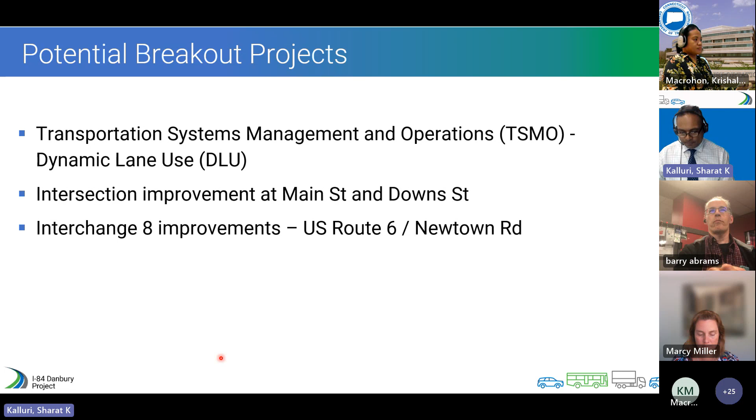So let's talk about the first one, which is the TSMO dynamic lane use. What is TSMO? TSMO is an initiative by the Federal Highway Administration. This basically looks at maximizing the use of existing and planned transportation infrastructure. It doesn't have to be roadways—it's transit, it could be multimodal rail, it could be active transportation, which is ped and bike, it could also be other types of technology, it could be freight related.

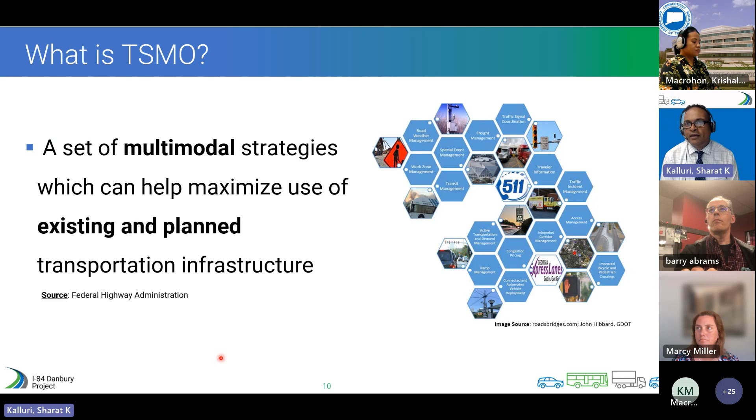The beauty of TSMO is it could be done fairly quickly. It maximizes the use of the existing highway. A lot of the work in TSMO is done within the existing footprint of the highway and does not require any additional right of way. So in terms of implementation, this is a pretty quick implementation timeframe turnaround. When I say quick, it's usually much quicker than a larger project would happen.

Keeping that in mind, for dynamic lane use, there are about 45 to 50 strategies that are part of the TSMO package. Dynamic lane use is one of them, which we'll get into in a bit more detail. The whole basic idea of dynamic lane use is that you're allowed to open or close a travel lane on the highway based on traffic conditions.

I go back to times when we were on the Tappan Zee Bridge, where there are lane use arrows on top that people adhere to, depending on time of day those lanes are being used or not used. There are other states like Michigan, Wisconsin, Pennsylvania, and other states down south also using dynamic lane use in different ways. We'll talk about the Michigan example in this presentation, but keep in mind these travel lanes are open depending on traffic conditions—it could be incidents, it could be other types of special events. So it's a strategy that's available to implement when there's a need to open that travel lane.

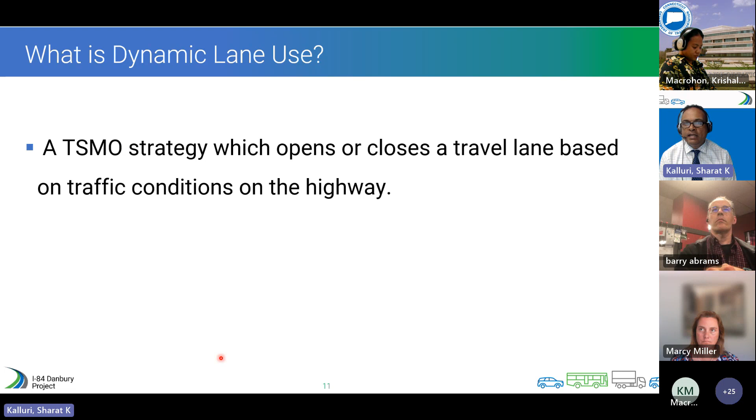So the extent of the dynamic lane use is we went through a lot of evaluation trying to look at the roadway geometry and conditions and the existing bridges along this corridor. The general area we're looking to start is just east of Lake Avenue, going eastbound to just around the Route 7 interchange on the east side. So the limits are somewhere just east of Lake Avenue to Route 7. The exact limits have not been defined.

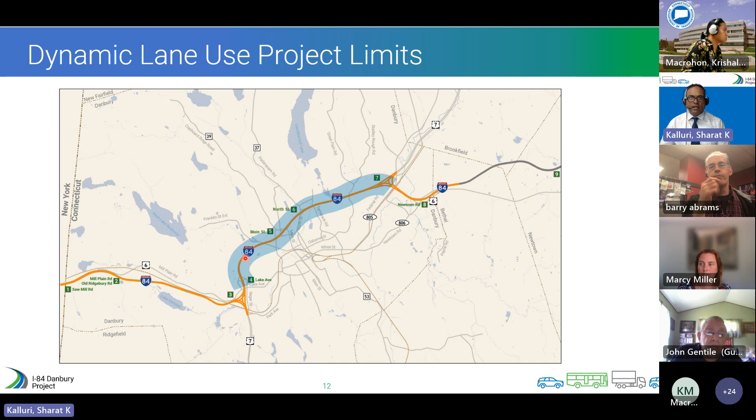That requires a little bit more engineering and design, but that's the general extent. Coming in westbound would be somewhere where the 7 on-ramp comes on, and the place where the 7 splits to the left-hand exit. I have a little bit more detailed plans later on, but it's about a 3.5 to 4 mile stretch of 84 that we're looking at, and this is the area where the need is in those commuter peak periods. That's in the morning going into New York, and the afternoon coming from New York, and that's kind of where the idea of the dynamic lane use came into study.

So general concept, this is a graphic that kind of illustrates. This is again kind of taking a piece of 84. This is not exactly how it's going to be done, just to show the concept of how it operates. So if you see this, the dynamic lane use in this case that we are looking at is being looked at as the use of the left side shoulder. There's an existing median, as you all know, there's lighting on the median. The dynamic lane would be on the left side, on the shoulder of the left side.

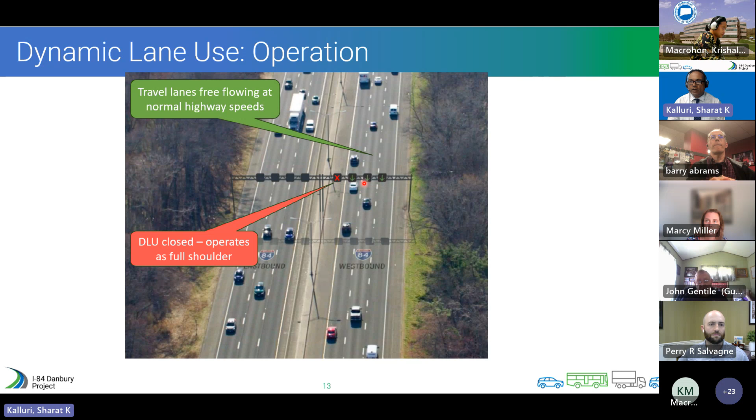So the lane use signs here are indicative of what lanes are open. Here it shows 3 lanes are open. You can see the traffic generally seems pretty free flowing. That's why the dynamic lane use is closed. Since there's no need to open that because the traffic seems pretty good, the lane is closed. But then as the traffic builds up, and this is a situation in the morning rush hour if you're going towards New York, same in the afternoon rush hour coming from New York, now suddenly it warrants the need to open up that lane. And that's kind of when it would trigger it.

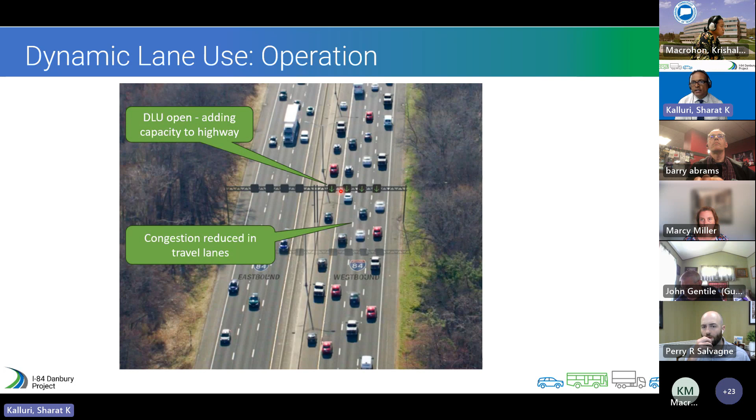So there are going to be triggers or strategies that will be looked at, for when the lane should be open and when it should be closed. Generally speaking, the commuter peak periods we know is where the need is in the morning and afternoon. But there could be other events, and as you'll see in the Michigan example, they've been using it for different situations. The lane could be opened or closed for any special events, or if an incident happens where the right lane is closed, the dynamic lane could be opened up to shift traffic over to that shoulder area.

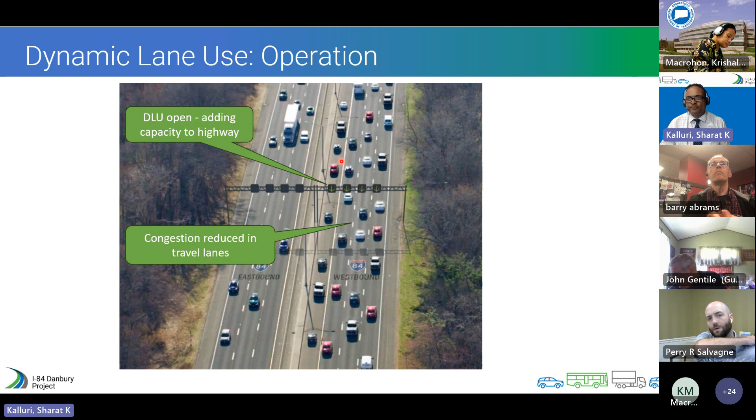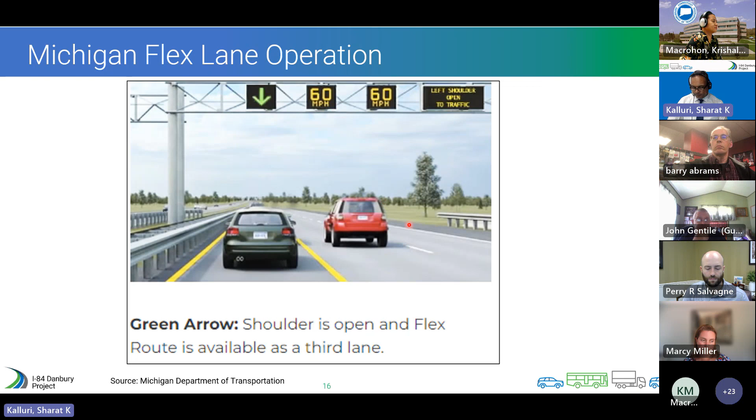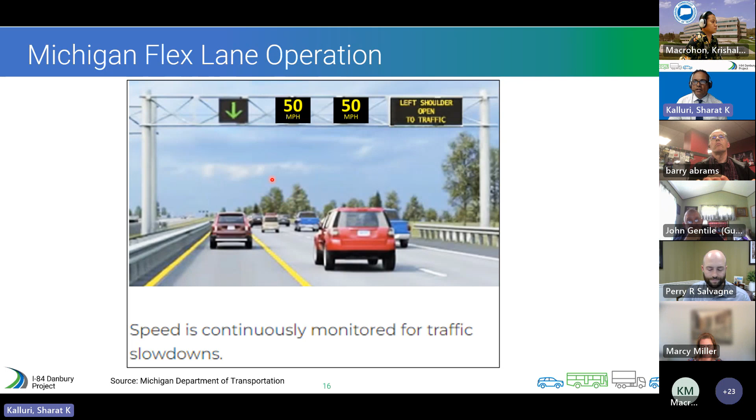In a second scenario, it's possible there's congestion downstream, so speed is continuously monitored and could be changed to a lower limit than 60, allowing people to recognize there could be an incident ahead and that they need to slow down. This type of technology helps the overall operation of the corridor. Essentially, it's a management strategy on how the corridor is operated and how this lane can be opened or closed depending on downstream conditions.

Here's an example of when the lane is closed. You see this is kind of a blank-out sign, meaning the variable speed messaging is no longer active. So whatever the speed limit is on the highway, posted on the signs on the right side, is in effect. This is additional signage that says left shoulder closed to traffic. There's a lot of technology being built in to inform motorists about downstream conditions, and also in advance, so they don't react suddenly to a situation when they get there.

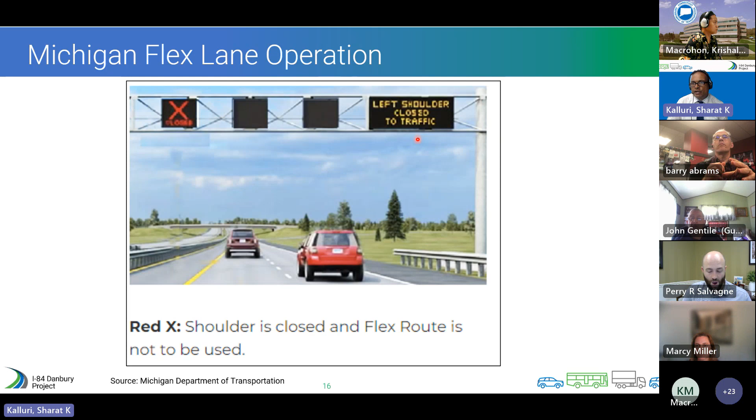The other type of indication is like this situation where a lane is closed. The right lane is closed, and this message sign shows that traffic should merge. This lane is now open because that lane is closed, and it shows an incident ahead. With these signs on the gantry, motorists are informed of conditions and can change their behavior. More importantly, the use of that lane becomes active whenever the need is there at that time.

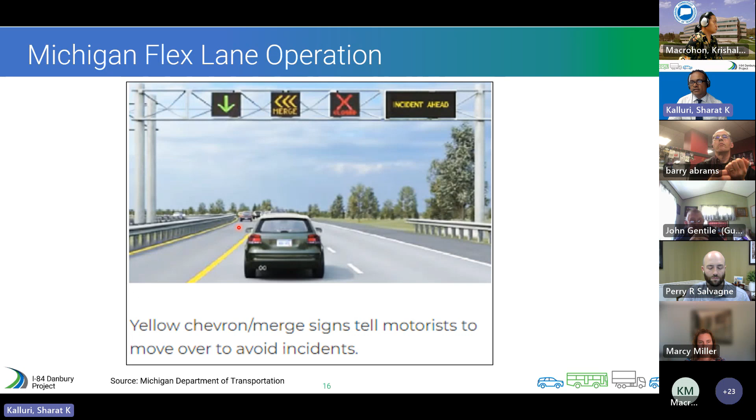Here's a more detailed view generally showing where the DLU use is going to be looked at as part of the I-84 project. This is the Lake Avenue section, just east of Lake Avenue, with the overpass over Lake Avenue. We're looking to start it somewhere where that off ramp comes off to Lake Avenue, and you can kind of see this green lane here.

So the idea is to get that traffic on the left side. One thing I'll talk about later is the presence of these left-hand exits, which will need to be looked at more in design. But the idea is to get traffic onto this shoulder, representing a condition where we would do it in the evening, for example, going eastbound, to allow them to travel and use that lane going east during the evening, and the same applies westbound in the morning.

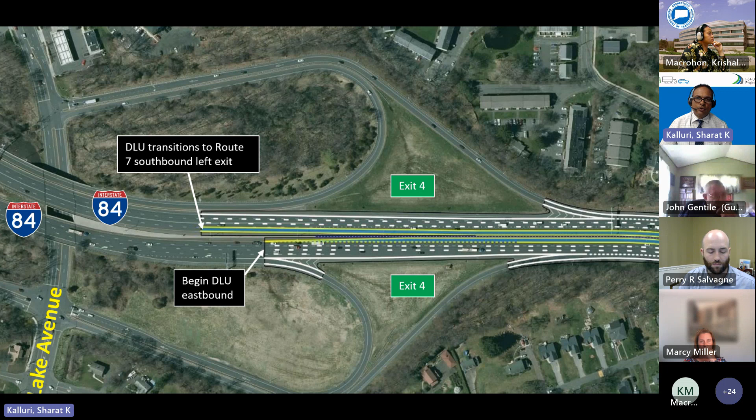But the idea is to use this additional capacity, or the additional shoulder space, for travel during those peak periods and other periods when it's needed.

On the east side, similar idea as the west. In the eastbound direction, it would basically terminate similar to the west into that Route 7 off ramp. One thing not being done as part of this project, which will be a much larger initiative, is switching the left-hand ramps on Route 7 to the right side. Those ramps will remain on the left, and that's why those transitions are critical in terms of how traffic is directed to move out of those lanes.

On the east side, going west, as you're coming from Route 7, this area is going to be opened up to 2 lanes. We've heard this comment from several folks about the Federal Road on-ramp and Route 7 South merging into a single lane before the merge. So the idea is to keep that as a 2-lane on-ramp and merge it in as a 2-lane on-ramp. At some point, for a short section, you'll have 4 lanes, and then that 4th lane would transition into the DLU lane.

That's again a detail we have to work out. The idea is to maintain continuity with the 4 lanes coming in where Route 7 merges in, and transition that to the dynamic lane while still keeping those 4 lanes, so we don't lose that capacity as the transition happens. So those are, generally speaking, the west end and east end concepts.

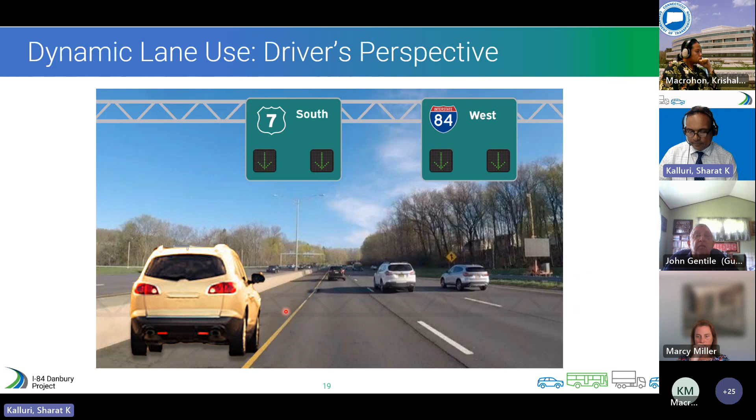Some of the benefits, which we may have mentioned when we presented this concept: the peak hour delay is reduced. Granted, speeds won't be as you'd expect on a regular travel lane, because we're providing a 2-foot shoulder with an 11-foot travel lane that's still constrained. We do see capacity benefits because it provides additional lanes. Some states we've spoken to have seen safety benefits. Essentially, it controls speed, and the variable speed sign is a way of maintaining a certain speed throughout the corridor and controlling traffic flow.

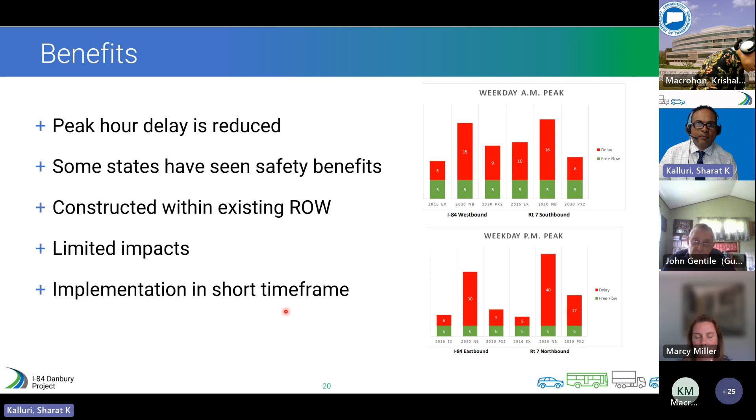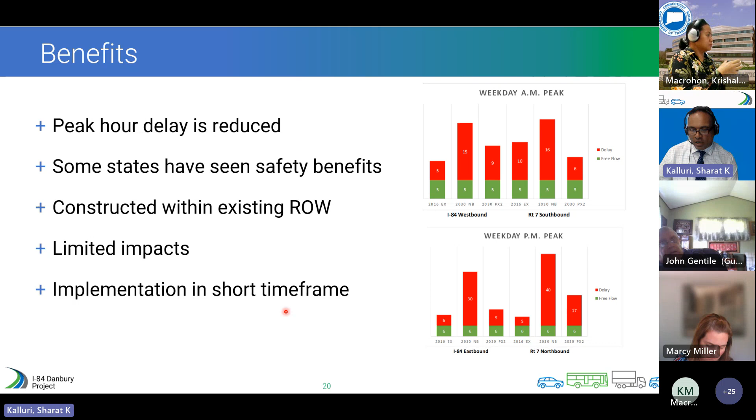It can be constructed within existing right of way, which is what we're seeing in our project. We're going to construct within the existing pavement width. The impacts are minimal, so we're not looking to work on any of the structures as part of this initiative; a lot of those structures will be kept in place. There may be some work on the median side, which the department is still evaluating, whether to keep the median or replace it. So there are very limited impacts related to the footprint or width of the highway. Everything will be worked within the existing footprint, and implementation is on a short time frame, which we'll talk about later.

We have had conversations with different groups. We coordinate with Federal Highway, and we've also met with the states of Michigan and Wisconsin to understand their process and how they're using dynamic lane use. Future coordination will be with emergency services and other stakeholders, including the city and the communities. There's going to be a lot of public outreach to push this concept through.

We are currently working on doing some feasibility analysis. The environmental review and design should shortly be commencing this year. The anticipated construction completion is 27-28, so this is about a 5-year cycle to design and implement, roughly.

Any questions on the DLU? Hi Sharat. Yeah, there is one question in the chat from Barry. It basically says: question on the DLU on I-84 west by exit 7.

Right now there's no actual merge from Route 7. With 4 lanes there still won't be, but will people realize there is no merge? I thought that must be what slows down traffic as far back as exit 11 during rush hour.

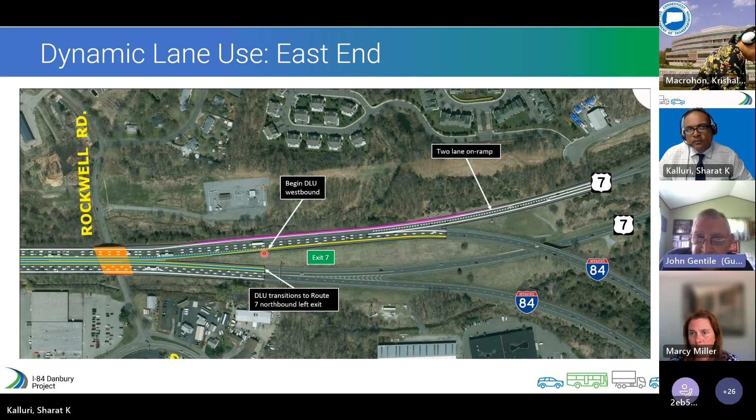The overall concept of dynamic lane use works when the road is fairly straight and the inclines are minimal. You have a big problem in that whole section in both directions because you have a severe curve coming from exit 3 into exit 4 going eastbound, and also a curve coming from exit 9 towards exit 8 where you don't see traffic. Then you have the incline as you go up to exit 6 going westbound.

If you don't fix that, the dynamic lane use is only going to have a minimal effect on traffic flow during peak times and even off-peak. This stuff backs up on Sundays, in both directions. So until you fix those hills and curves, this is just a minimal impact on traffic in this region. And I said that from the beginning.

I said that at the last meeting, and the comment was, well, we've taken that position and we're not going to adjust the road in any way, shape, or form. So the whole concept here, to me, is going to be useless. Right now I'm just along for the ride. So that's my comment—I agree with John on that point.

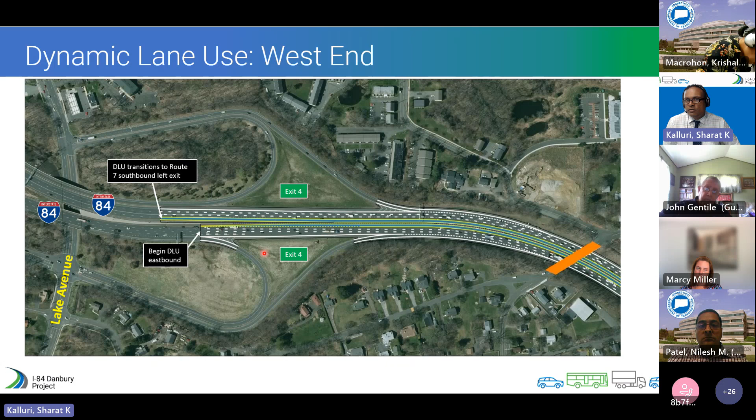We are at the very early level of planning in this, to understand all the different opportunities we have to implement something that could potentially help those peak period congestion, and not have to wait for that final project down the road, which is several years away potentially. We are not the first state doing it - several other states have done it and have similar conditions out there. We just want to explore that and see what things can be put forward.

In terms of technology, the corridor will be implementing incident management cameras, so we'll have full coverage within this corridor. If you have a breakdown, our highway operations would be notified and they can close the lane if that were the case. So there will be technology incorporated into this concept. When you talk about enforcement, well, that's a whole other discussion, especially with legislative actions in terms of how you can do enforcement outside the traditional methods.

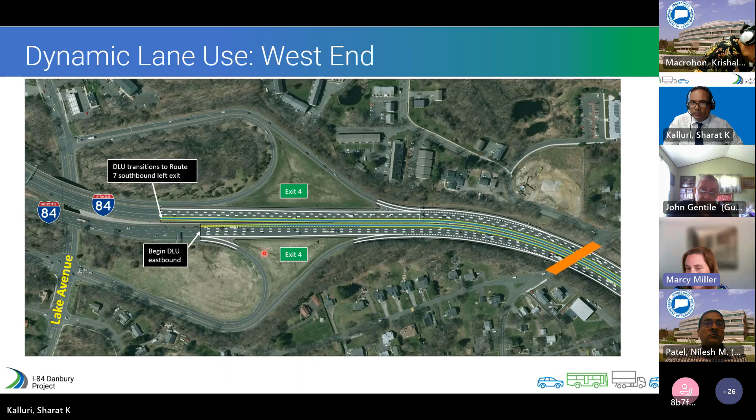All right, I want to confirm, that was James, that was you that just spoke up, correct? I have not spoken. That was Chris, I think. Oh, that was Chris. Okay, I was trying to take notes, I missed that. My apologies, I'm sorry, I'm on my phone and also on the computer. I'm glad you caught that because it made me think twice.

No worries. So, other questions or comments for the team? I know they've been kind of trickling in, but this is good discussion and it gives us a few things to look back on.

Okay, so move on to the Main Street, North Street, and Downs Street intersection. We've talked about this in previous meetings. We had done a more detailed analysis of the Main Street, Downs Street intersection than what we had done as part of the needs and deficiencies work that's part of this project. This intersection has been a concern—it's kind of the centerpiece of the downtown gateway, if I would call it.

So traffic operations is a huge concern here. The conditions during peak periods at this intersection, especially gridlocks during peak periods with poor levels of service and queuing at these intersections, at all these approaches. There's a sightline concern as you're coming down Main Street, looking through this overpass and looking at the signal. Sometimes you're getting very close to the signal and you don't even know it's green or red. So there's poor sightline coming in.

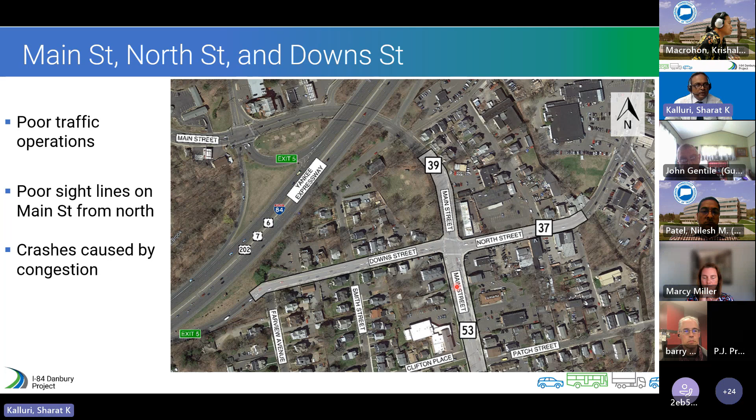All right, let's go to the interchange 8 improvement. Just to orient everyone, this is interchange 8, the easternmost interchange of our project limits. This is Route 6 - the Route 6 piece comes off of 84 and then continues as Route 6. This is a one-way road going eastbound. Going westbound, you have to go on the other side of the highway, and that becomes the westbound and continues on to 84. Newtown Road, as many of you know, is a big commercial retail corridor. Newtown Road comes into this interchange area, and people who want to get to 84 westbound from Newtown Road would have to travel eastbound on Route 6, turn around, go westbound on Route 6, and then get on. So it kind of creates this complicated circuitous route and creates additional traffic that's just turning around here and going there.

The other issue we see is this on-ramp on eastbound is located at a point where Old Sherman Road and Payne Road can't get access to it. People who come off these roads - there's quite substantial traffic, about 200 or so cars here turning right in the peak period - have to again turn around and come in and get back on.

So it creates that additional movement. And then we also looked at this traffic coming from 84 westbound. I know some of you have said that's not that enticing, but there's a lot of crossover traffic. As if you are coming in this area, there's a lot of crisscrossing traffic to the gas station, some people trying to get to 84 westbound, and some people continuing on to Newtown. So this westbound ramp sometimes creates those crossover traffic movements in this section.

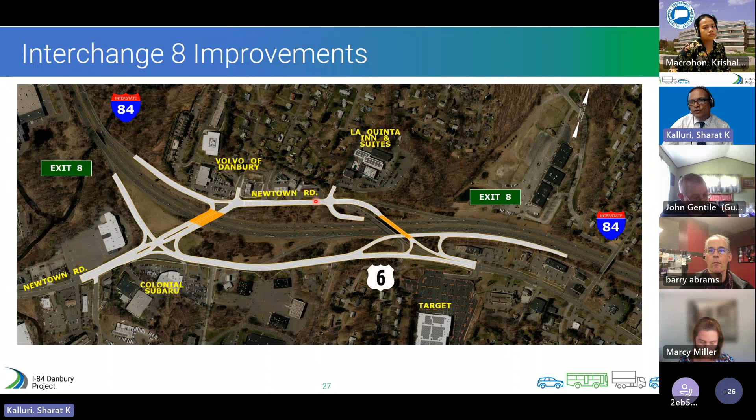So we looked at this interchange to try to see what can be done relative to improving some of those operations. The first thing we looked at is to move this eastbound ramp further to the east and allow for that traffic coming from here to be able to access it, which shifts this ramp about 600 feet to the east to this on-ramp, and also looking at providing that access from Target Drive to get on the eastbound ramp, which today doesn't exist.

That would allow traffic to get to 84 East sooner versus having to loop around and make that movement. The other thing we looked at is the 84 westbound ramp, to try to move that further to the west and come off opposite the gas station drives and the hotel drive, just to allow that traffic that's getting off, which is mostly trying to go to Newtown Road, to stay on the left side and not be on the right side, which reduces that crisscrossing behavior where traffic would be getting off and trying to cross to the left to Newtown Road. So again, a small change, but a way to put traffic closer to where they want to go.

The last and big one is this improvement at the interchange itself of Route 6, coming off exit 8, going eastbound and westbound, to try to prevent that Newtown Road traffic I was mentioning from having to go around and come back on. What we looked at is a new type of design being done pretty much everywhere in the country called the diverging diamond.

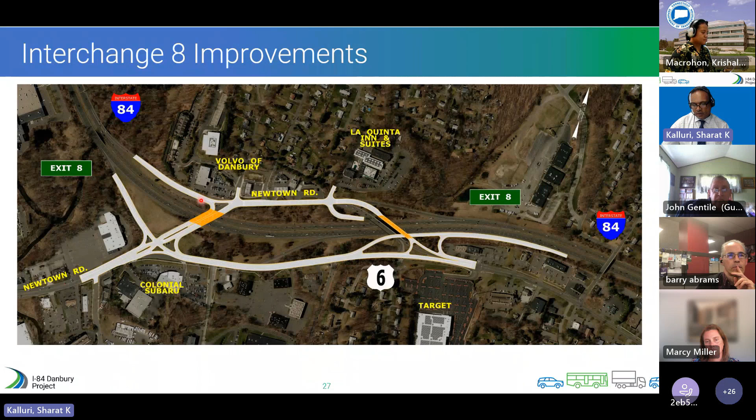In the same way, traffic coming from Newtown Road would be on the left side of that and then switch over to the right, and that switchover is essentially controlled by a traffic signal. So the big benefit of the diverging diamond is we take away a significant amount of traffic that is turning around and making that move, putting them on this side where they can pretty much go unrestricted onto 84. So the idea here is to look at this as a potential improvement for this interchange.

That's a relatively new concept in Connecticut. I know there's one other interchange being looked at as a diverging diamond, but it's kind of a new thought in Connecticut to do this kind of layout.

Any questions on that? I don't see any, Sharat. Okay.

So before I turn it over to Krish, any questions that you guys have on any of the presentation material that we have? I know some of you had some great comments.

I guess I have a question, because when you were presenting the diverging diamond, I did see a few heads nod, and I want to know—we didn't have any comments. So do people generally think that could be a good thing, or do you still need to look at it a little more?

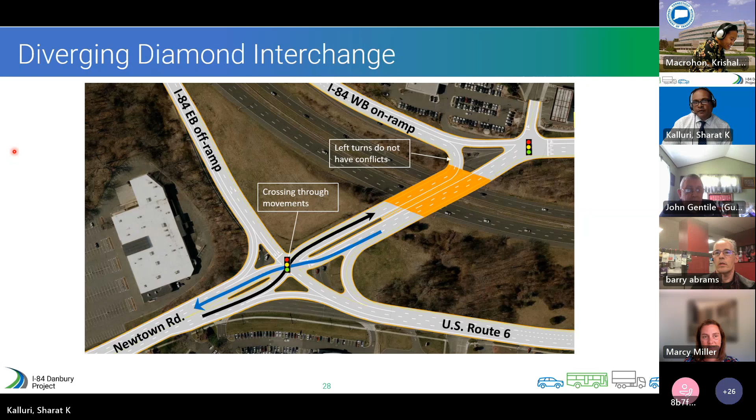I'm interested to hear that. That one's gonna work. Yeah, that's a great idea. I agree. Okay, I'm on board with this. Okay, perfect. Any other comments, questions?

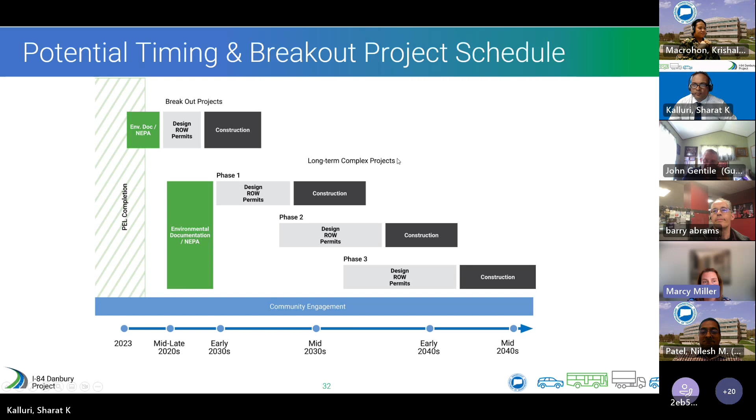Thanks, everyone. Thank you for including us. Thanks, bye. Bye-bye, thank you, have a good one. Likewise.